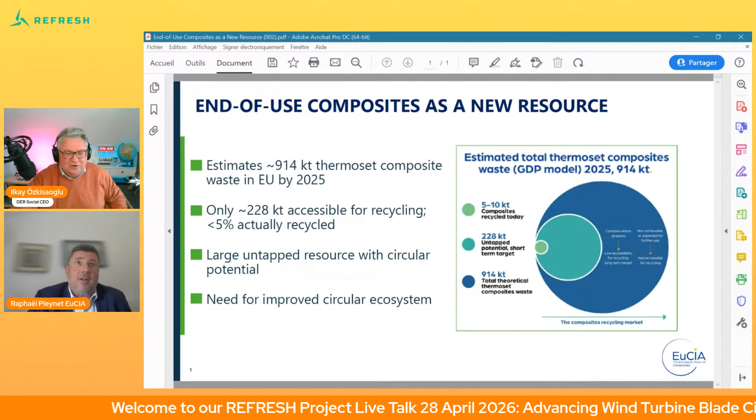Okay, let's get started with Refresh. Before talking about Refresh, because my colleagues will do it more deeply, I just want to share the vision of EuCIA regarding circularity. Instead of having a lot of slides, only one: the picture as it is today about the waste volume reaching the end of life of thermoset recycling, the thermoset composite materials.

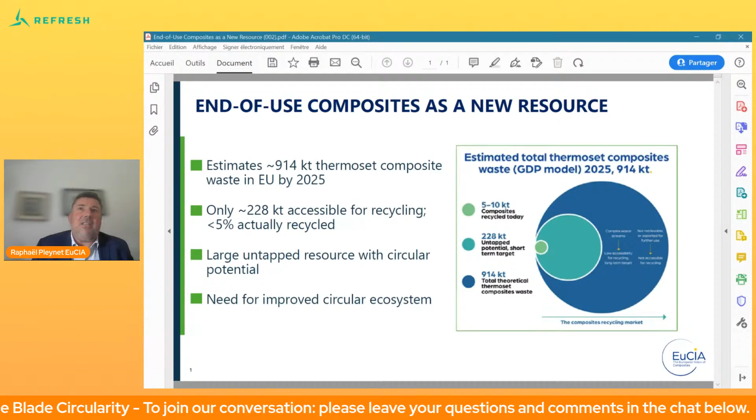As you can see on this graph, we made some calculations some years ago. That's an interesting story. In 2018, EuCIA had the vision to already start evaluating what was the volume of recycling material, the potential recycling material, meaning the volume of composite material reaching the end of life. At that time, it was around 450,000 tons. They decided maybe not to communicate it because they were not sure — maybe it was not good news. So we did this calculation again, updated in end of 2024, to estimate what the volume was last year.

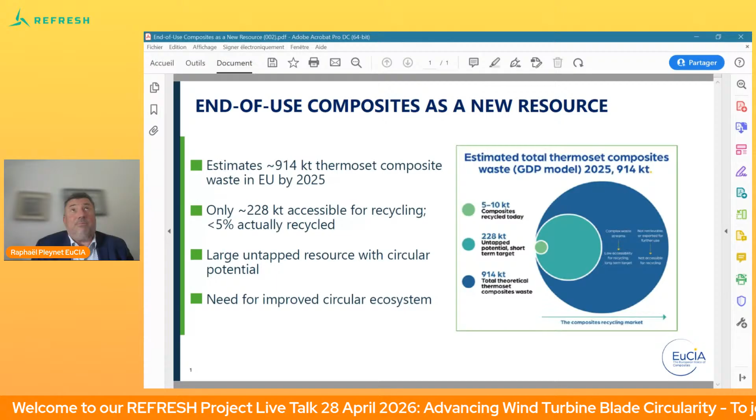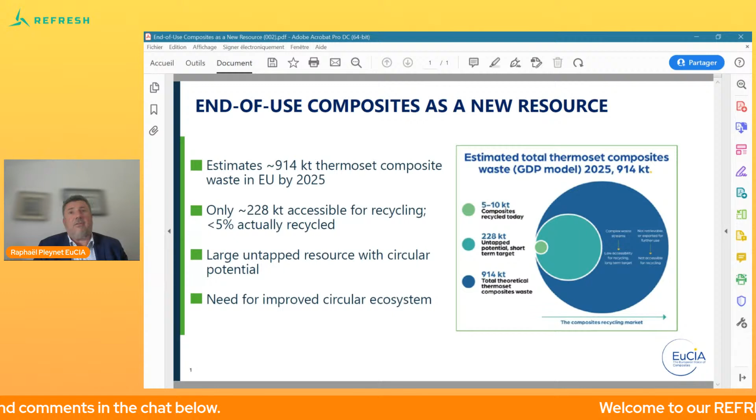We also have some graphs to show the trend. Now, as we have probably started to evolve, all of us, regarding the vision of the end of life of material, we see it as an opportunity. We estimated there is a theoretical potential of 900 kilotons, 900,000 tons of materials reaching the end of life last year in Europe. From there, we have evaluated the untapped potential — almost 230,000 tons — what is really available now.

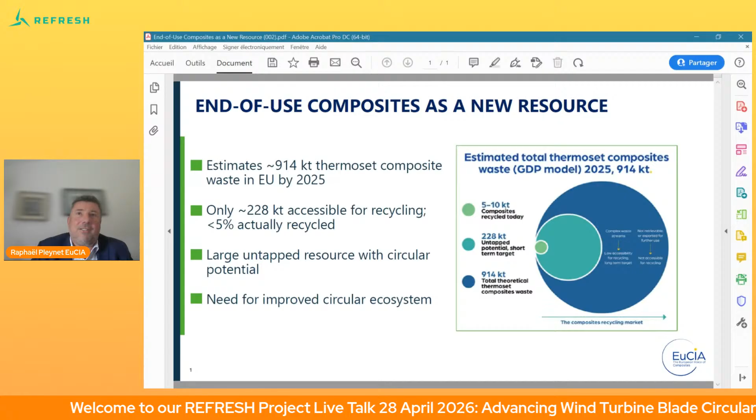Those two numbers are very interesting to see what we are talking about — how big is the question. It's also to motivate investors, waste recyclers, all the supply chain to come, because there is already something there. Then the third number is also interesting: only 5,000 to 10,000 tons are truly recycled today. So it's almost nothing. This is what our whole challenge is about, and it's why we are speaking about circularity.

But circularity today is even more important because it will reinforce our resilience. We want the European community to be less dependent on imports from abroad, and it's also an opportunity to reuse at the end of the use of a material. You can reuse it through different options. One of them is recycling, but before recycling you have reuse, repurpose, remanufacturing — all the R's, you may know. It means finding a new function for a composite material.

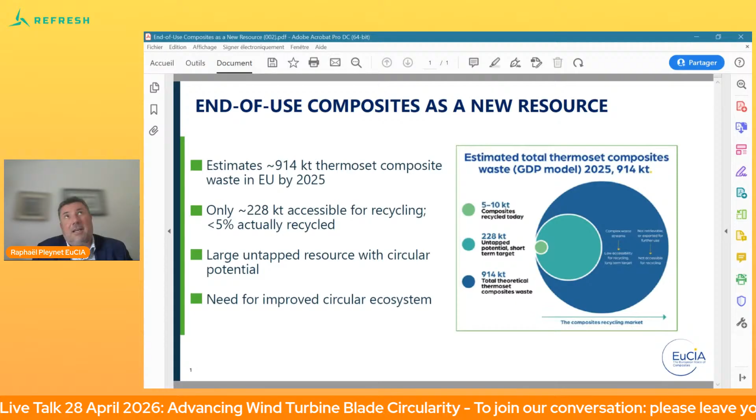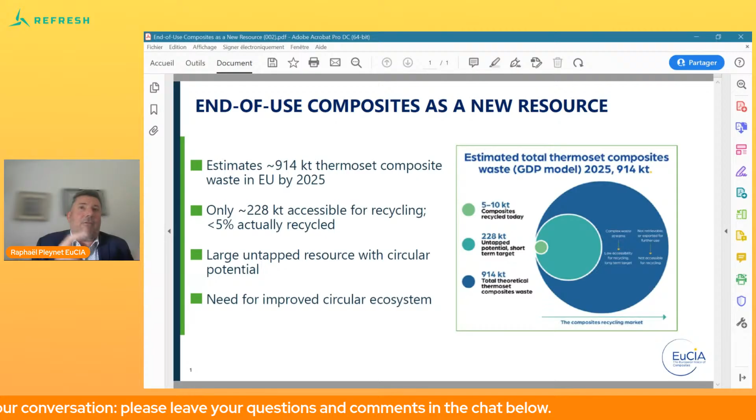As you know, from the beginning, composite material has been designed for performance, durability, and lightweight. That's why you can reuse composite material for 50, 100 years. For example, recently I was talking with the boating industry, and we use in our calculation that the average boat life for the hull is 50 years. One person from Finland challenged it and told me it could be 100 years — and he's right. You have to take an average, because a boat that's 100 years old is probably old-fashioned, so you have to redesign it. But the material itself, the composite material, works for 100 years and even more, probably.

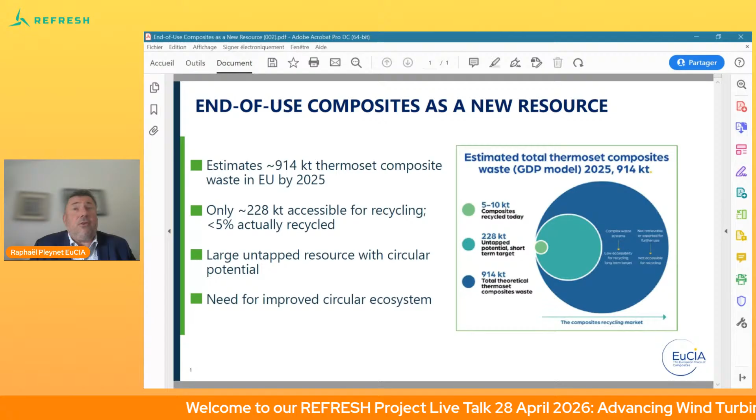So we are all focusing on how to organize the value chain to connect the people, and that's also what we have started to do with the European Circular Composite Alliance — to put all the stakeholders together and figure out how to address it.

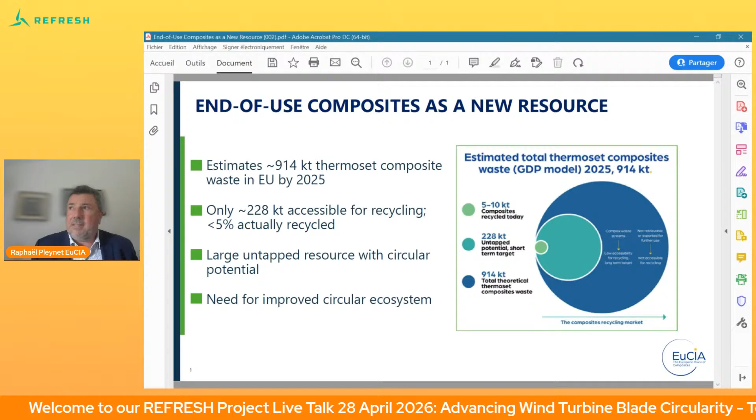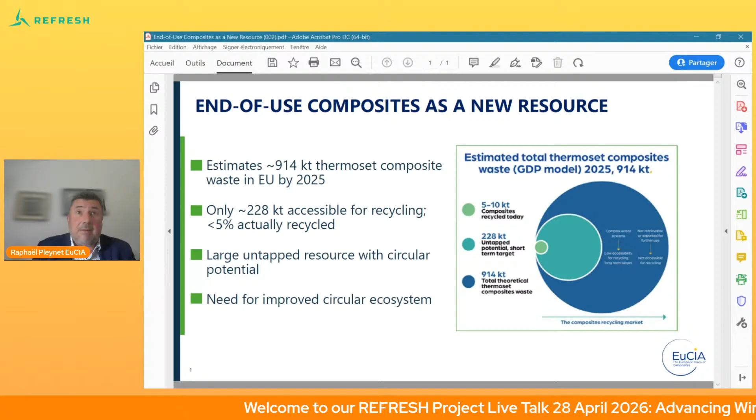The point today regarding Refresh is that Refresh is almost 4 years old, so it means we started thinking about this project 5 years ago. At that time, it was to demonstrate with a holistic view how we can recycle wind turbine blades. What's fantastic is that after almost the end of the project, we see through the different technologies that, yes, it's possible. So today it's not a question of whether it's technically possible, it's how to scale up the technologies a little bit. You will see that the technologies are ready.

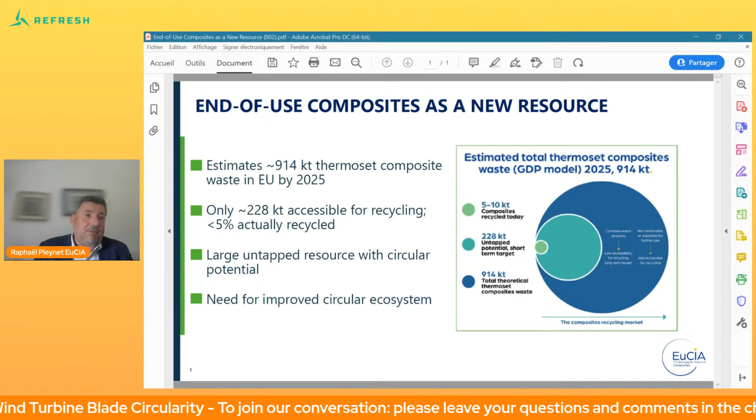This project has personally taught me a lot about different technologies, whether mechanical recycling or thermal recycling. We have a huge manufacturing investment, and that's also the passionate part of this, with all the challenges when you go to commissioning and all these things. But we demonstrate through this project that it's possible.

On top of it, and I will finish on that, we also had a view on other possibilities to reuse the material. We did calculations of LCA. We see that when you do all these technologies, you can also reuse the resin and reuse the gas, which is also a value. That gives a lot of hope for the future of composite material.

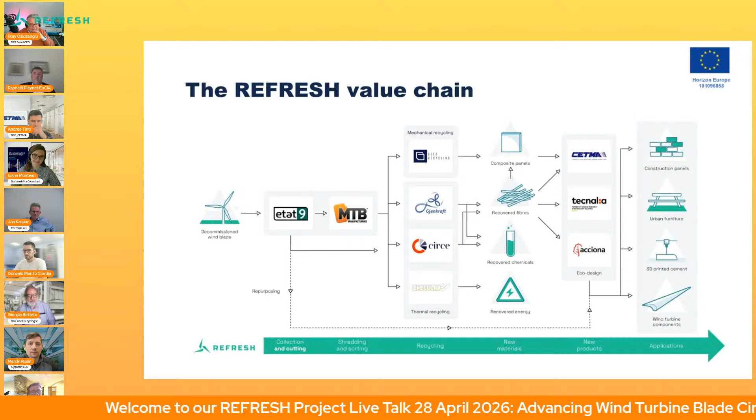Okay, hello everyone, I am Daniel Grisenti, the project coordinator of the Refresh project. So I will be giving you an overview on the project before leaving the floor to the other partners that will present in detail their technical work and part.

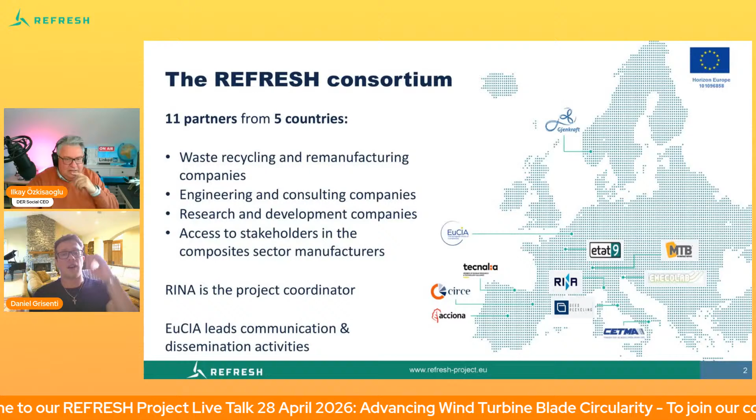A quick overview on the consortium: we have a total of 11 partners from 5 different countries working on our project. We have waste recycling and remanufacturing companies, engineering consulting companies, as well as research and development companies. RINA is coordinating the project, and we have EuCIA as the communication and dissemination activities leader.

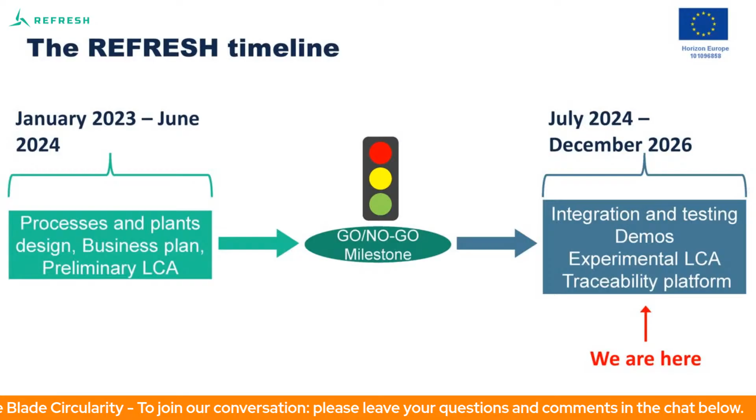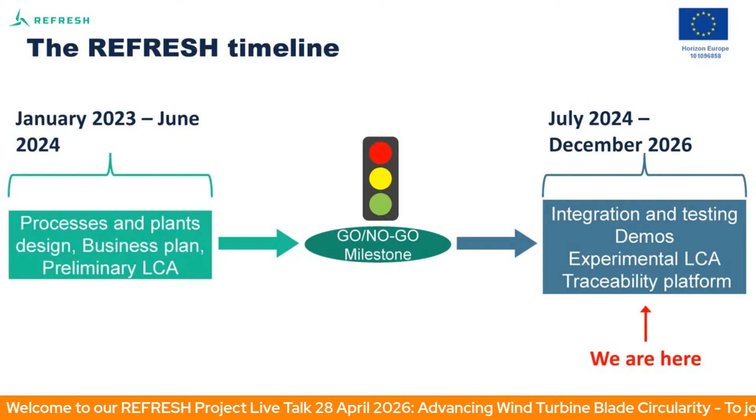The project started in January 2023 and will end in December 2026. It started with the first design phase in which the process and plants were designed. After that milestone, the design phase, we are now in the integration and testing phase, which will end with the end of the project.

So let's give an overview of the concept of our project. The whole idea is that we start from the decommissioning of wind blades - the end-of-life wind blades - and we cover the whole value chain through to remanufacturing into new end products. We start with the decommissioning, and then we have different recycling treatments: mechanical recycling, thermochemical and thermal recycling, repurposing, and so on.

And everything will be governed by the decision-making tool, which is an AI tool developed within the framework of the project, that will decide for each decommissioned and pre-treated wind blade which route will be preferable at that moment, based on market demands and also the condition of the blade.

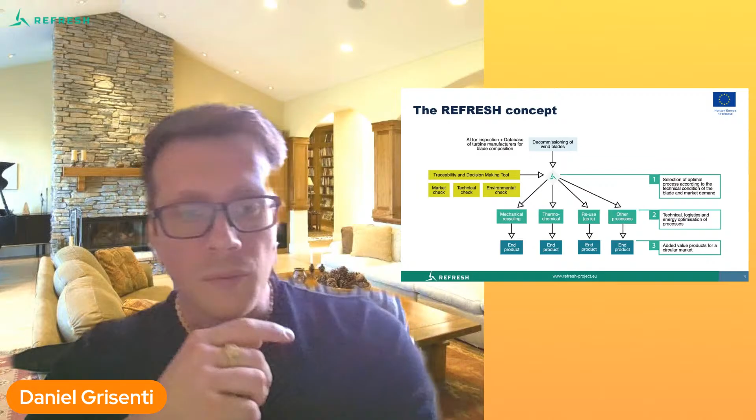Briefly explaining the value chain and the partners, so you can see where our partners are located. We have the decommissioning of the wind blades and the pre-treatment, which consists of pre-cut and pre-shredding, done by ETAT9 and MTB. Then we have the recycling phase, divided into mechanical recycling from Gees Recycling, thermal recycling from Gjenkraft, Circe, and Ecolab for dust recovery.

This leads to composite panels, recovered fibers, chemicals, and energy from dust recovery. Then we have other companies like CETMA, Tecnalia, and Acciona, covering the last part of the value chain into applications and the final end product, like manufacturing of construction panels, 3D printed cement, repurposing, and other wind blade components.

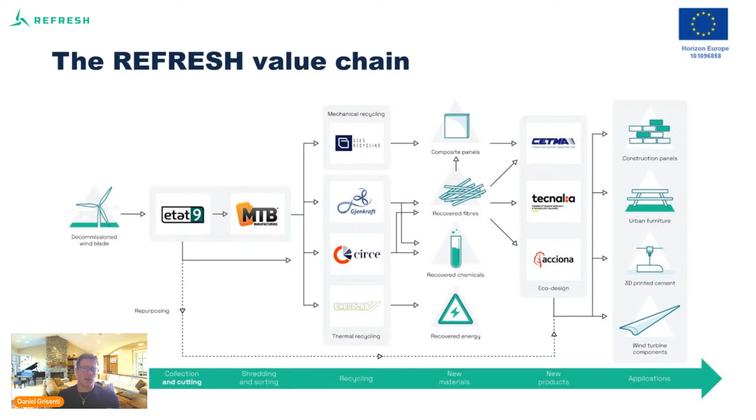So this was a quick overview of the project. I will leave the floor to the other partner now, who will explain in detail what I have basically shown.

All right, thank you so much, Daniel, for these insights. Let's continue with Giorgio Betteto from Gees Recycling. Giorgio, I've known for a couple of years now, I interviewed him already at JEC World, I think in 2024, with very good results. Giorgio has interesting solutions and also prepared a presentation, so Giorgio, we leave the stage to you.

Perfect, thanks to all. Okay, I have to escape somehow this... I'm sorry, I took the wrong one. For some reason the numbers are covering.

So this is your presentation, Giorgio? No, let's get... Daniel one, no that's the wrong one. Yes, because it's still active with Daniel. That needs to go away, and yours has to come in. You see, community, there are a lot of presentations in my backstage right now, and I still need to get used to it. But this is Giorgio, I think now the right one, correct? Yes, now I think we are okay.

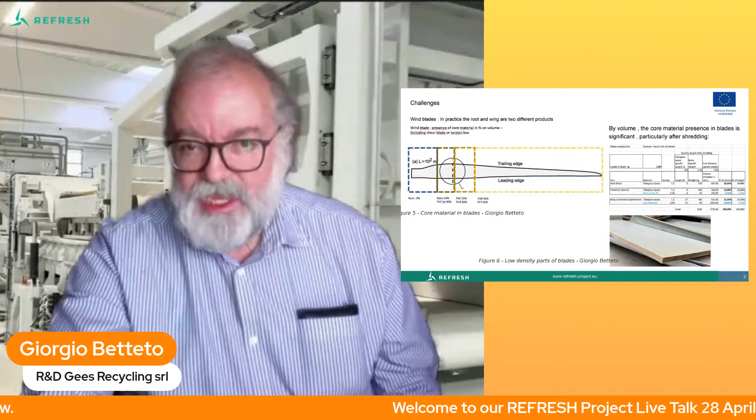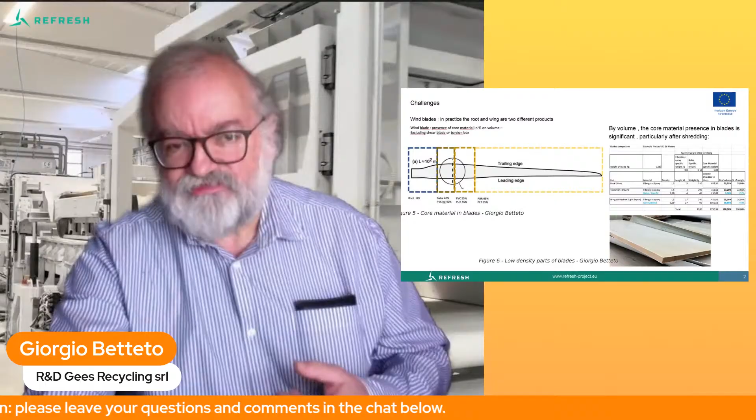A wind blade is practically three different composites. We have the root part, which is all composite, all epoxy and fiberglass, very thick and very hard to shred and particle-reduce. We have the transitional part, where we again have a lot of hard composites. Then we have the blade or wing part, where the quantity of hard composite is much lower, with a lot of low density material.

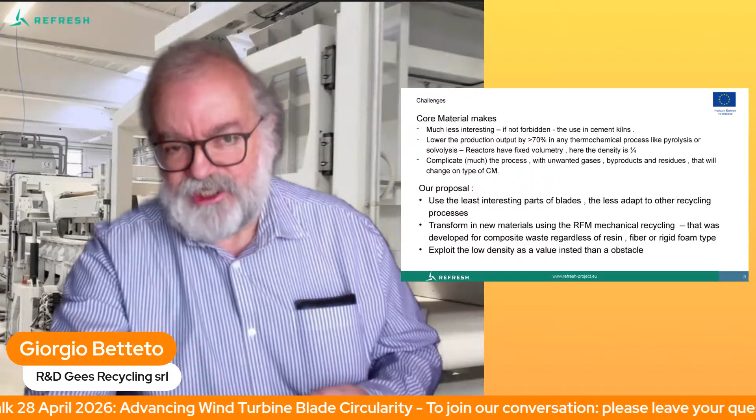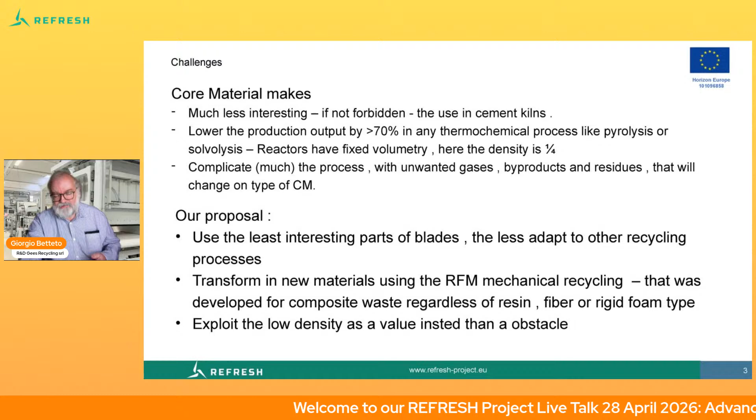So the composition is different and ideally requires a different recycling process, because the core material complicates any kind of thermochemical recycling. First, you have low density material, so any thermochemical recycling operating on a fixed volume vessel has lower production. Then you have a lot of different materials - we have found even four different core materials inside the blade.

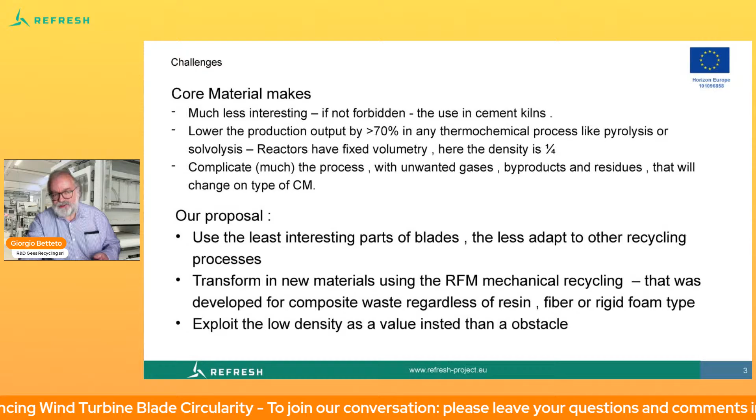Our solution is to use the thermochemical process where it's best suited, and use the mechanical process for making materials where we can process it regardless of the kind of resin, fiber, or foam.

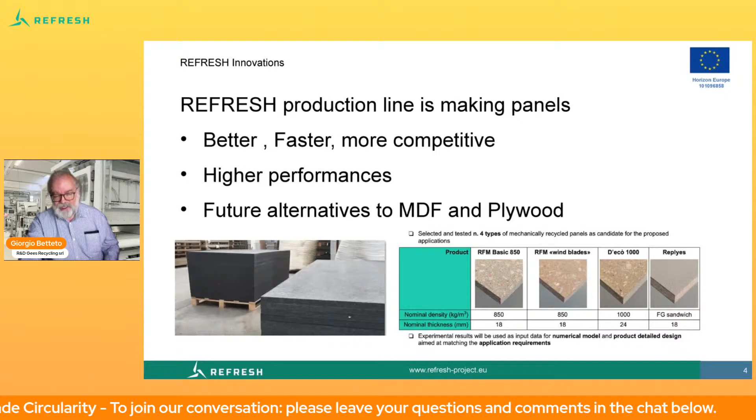Now we have the refresh production line. We currently have industrial production, and we are starting the new production line from refresh. In these days, we are doing trials and production tests. We have found that it's possible to obtain panels.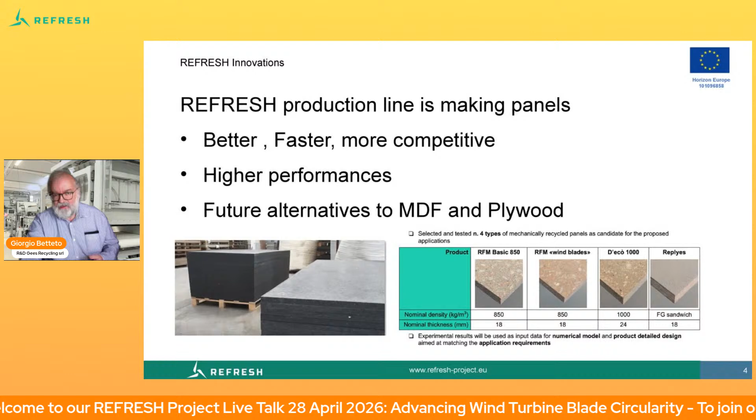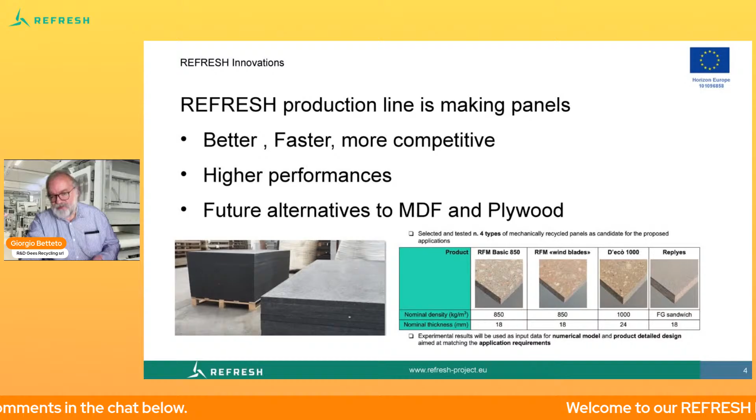Something relatively simple, but where there is a really large market - better, faster, and more competitive with the refresh production line, with higher performance. And not so much future, because we are already selling as an alternative to MDF and plywood, in different qualities for different applications.

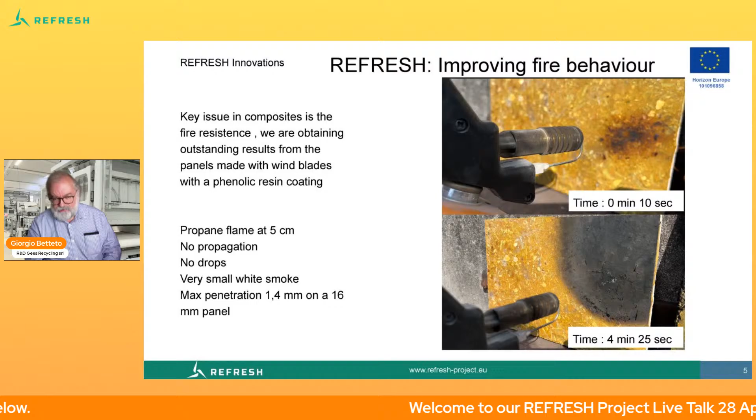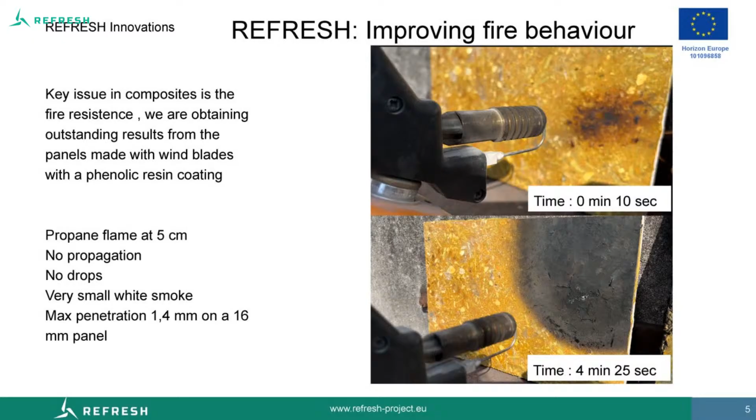One of the most interesting things in this development is that we found that using the wind blade waste with a specially developed phenolic resin coating, a low toxicity phenol resin, makes it possible to obtain really interesting fire-resistant behavior. We can achieve not just fire resistance but also smoke generation that is an order of magnitude lower than alternative products, so no black smoke.

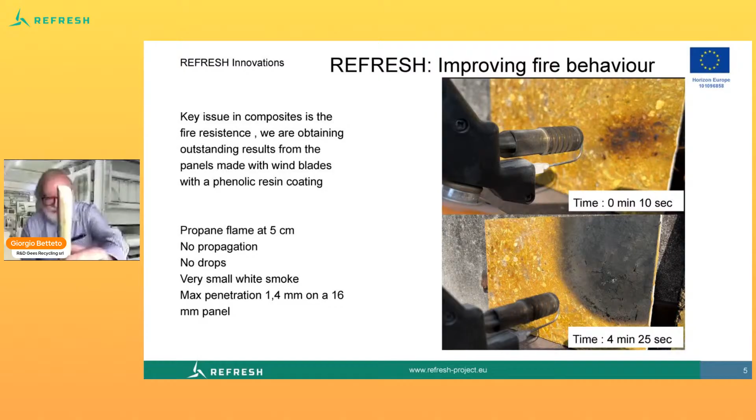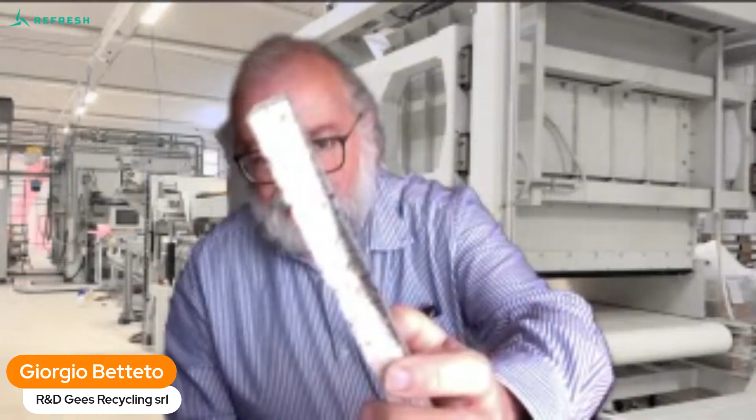And most interesting of all, it's also something where there is a very low degradation of the material. This is a cut of the panel that you see. Have you seen, fire penetrated for less than 1.4 millimeters after 5 minutes of propane flame.

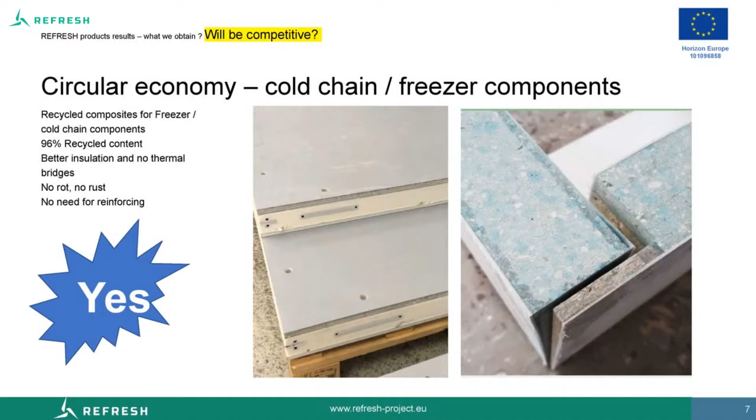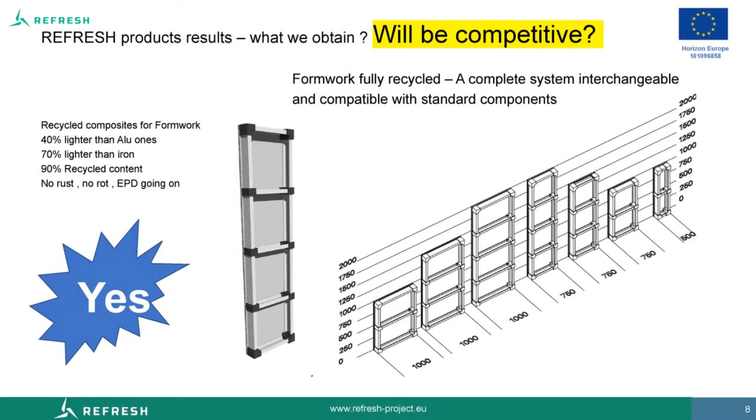So this is why recycled composites are the ideal material to make this. We are developing, and then Chetma will tell more about this, formwork for concrete. Also, because I personally think that could be a really interesting application using complete composite formwork, for example for the foundation of the new wind turbine, made with the scrap that comes up from the wind turbine.

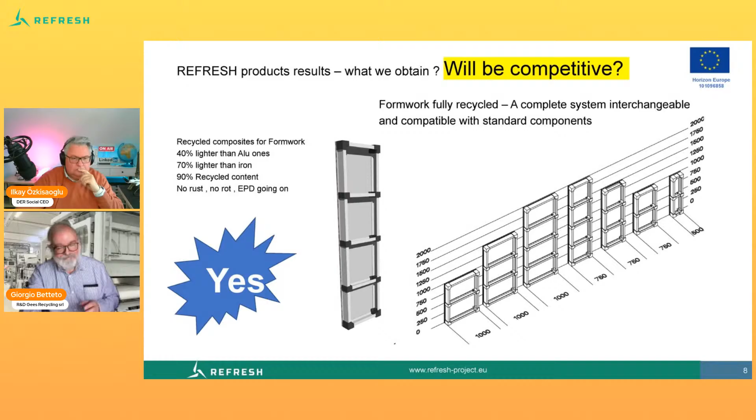Plus, we are also developing interesting projects, or already building, using also the recycled glass fiber that GMCraft makes, using the profile from wind turbines and so on. It's possible to make a lot of things with composite, mostly where you need something with long-term durability, low carbon content, and so on.

Okay, I have. I hope to be on time, and I am willing to answer any kind of question here or later.

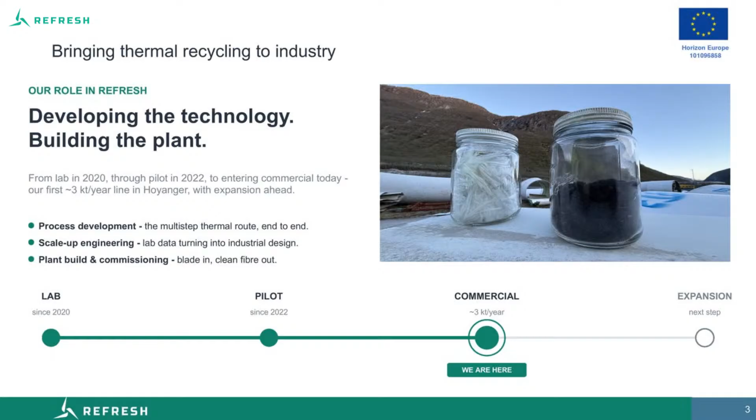And the last one, which is the most exciting, is actually to take those drawings and documentation and put them into real equipment, a real working facility with high volume throughput and the possibility to recover recycled materials for the industry. So the photo you see on the right is not just a plan, it's a reality. We are now finalizing the commissioning of our plant and moving to operation, where we will produce pure glass and carbon fibers for the future composite industry.

So our ambitions, where we are heading - we have three goals. We want to deliver. The immediate job is to prove circularity at industrial scale alongside our Refresh partners, to demonstrate with real data that the wind blade can actually become next generation composite products.

Then the scale, which is also beyond Refresh - we want to become Europe's leading composite recycling supplier. Our roadmap goes from today's first plant towards nearly 100,000 tons of composite by 2036. So we have an ambitious plan for how and when we want to grow, in terms of not one but multiple facilities, hopefully multiple facilities across Europe. And we want to deliver the recycling backbone to the maritime and automotive industries to actually move forward with composite recycling.

And the last one, the biggest one, is actually to transform. We want to drive the change, power new raw materials, turn yesterday's waste into tomorrow's resources, and make recycling of composite the default for the industry - not an exception or something nice to have, but actually a standard for the entire industry.

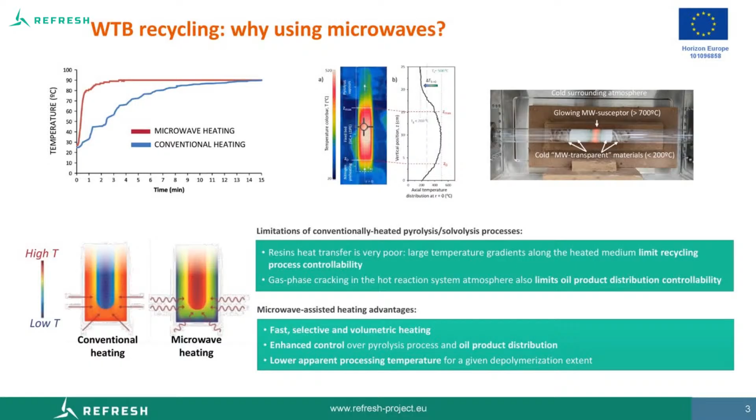Microwave heating offers a different approach. It can be much faster and more selective, and it allows us to heat selectively the materials that absorb microwaves, giving better control over the process and potentially over the composition of the oils produced.

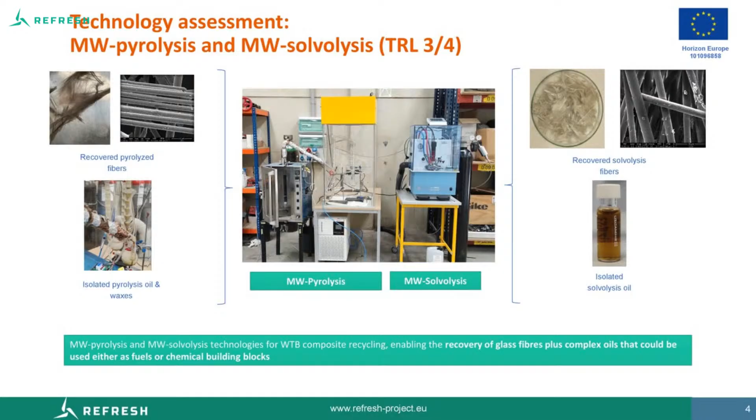This expertise defines our role within the Refresh project, where we are applying microwave-assisted technologies to support the recycling of wind turbine blade composites, comprising pyrolysis but also solvolysis. Both routes aim to recover valuable products from the composite waste: glass fibers and oils. The oils could potentially be used either as fuels or as chemical building blocks, depending on their final composition and quality.

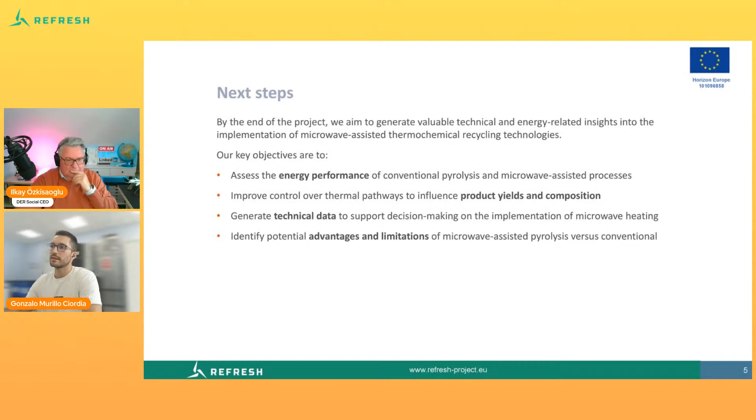To conclude, our next steps are focused on generating reliable technical data to support future decision making. We want to assess the energy performance of microwave-assisted processes, understand how they influence product yields and oil composition, and compare their advantages and limitations with conventional technologies. This way, the project will help clarify where microwave-assisted recycling can add real value for the treatment of wind turbine blade composites. And that's all from my side.

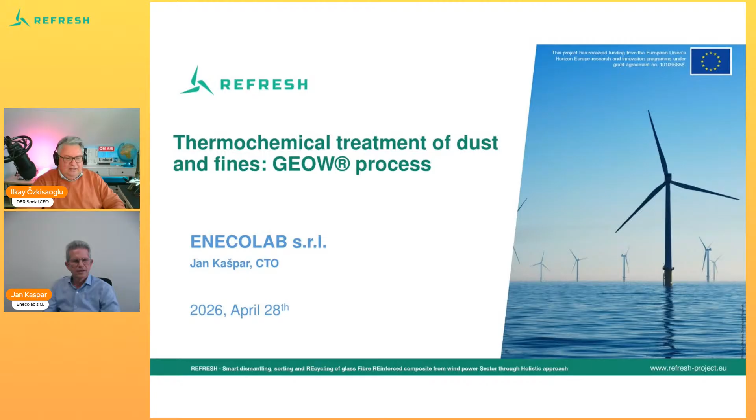As I said, thermochemical treatment of dust and fines is the specific task of our company. The interesting point is that dust and fines are the residuals of nearly every kind of processing of the blades. You have to cut them and so on, and they can represent a very large part of the starting materials. Clearly, the present routes are unfavorable from an environmental point of view, because either burning in cement factories, if permitted, or landfill is essentially how they are disposed of.

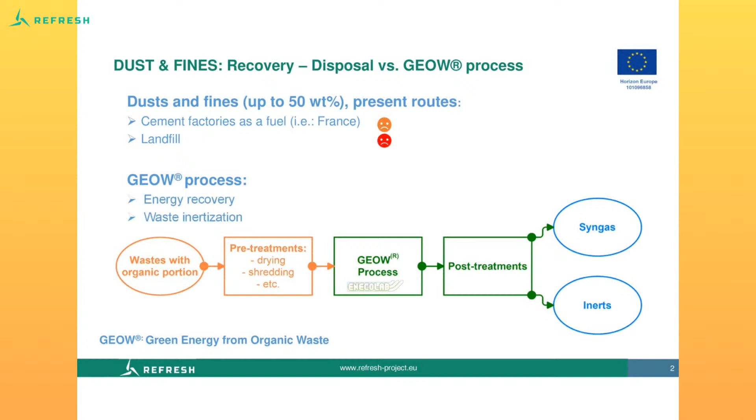Our process is simply a pyrolysis process, running at high temperature to produce mostly syngas as an energy carrier, and inerts. Pyrolysis is very often used in the valorization of this disposal material, but the point is that you have different kinds of products being formed: the gaseous part, the char, the liquid part, and the inorganics. Clearly in our case, it's the glass.

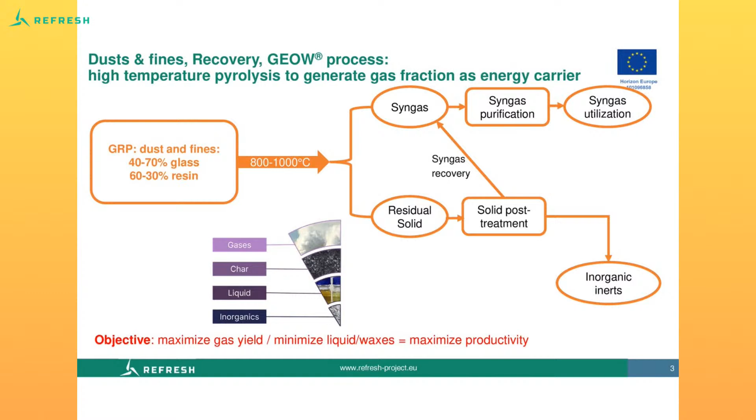Why go into the high temperature reaction? Because as you increase the reaction temperature, you improve the yield in syngas, which can then be used as an energy carrier, either to generate electricity, heating, or other purposes. But the residual solid typically gives out inorganic inerts. You have to keep in mind we are using dust and fines, so the fiber is nearly destroyed, making the glass less interesting. So the objective is to maximize the yield of the gas, which is the easiest energy carrier to use in our case.

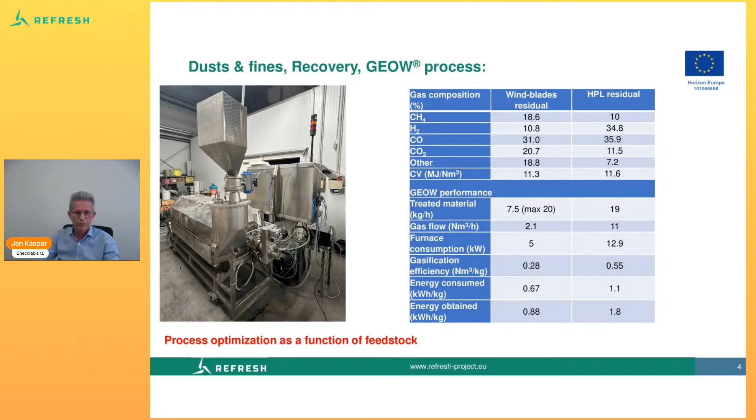The intrinsic point is the comparison between the energy consumed and the energy obtained. It seems quite low in this case because the wind blades have a large amount of inorganics. As you can see in our processing, if you use, for example, HPL, high pressure laminate residuals, you can obtain a quite high yield of energy compared to that use.

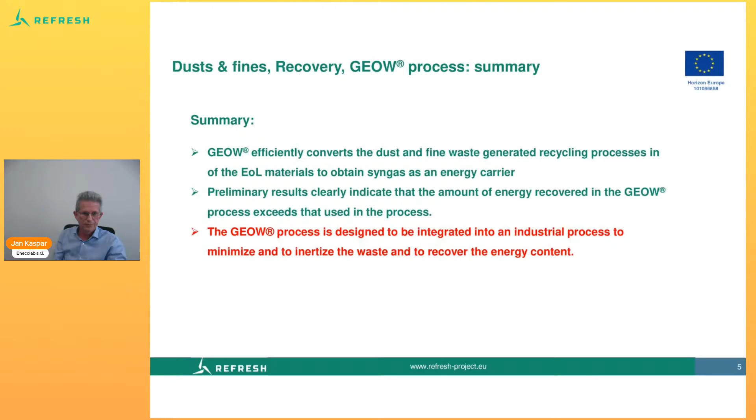So I wish to thank you for your attention, and if you have any questions I will be happy to reply. So thank you, Jan, for this introduction.

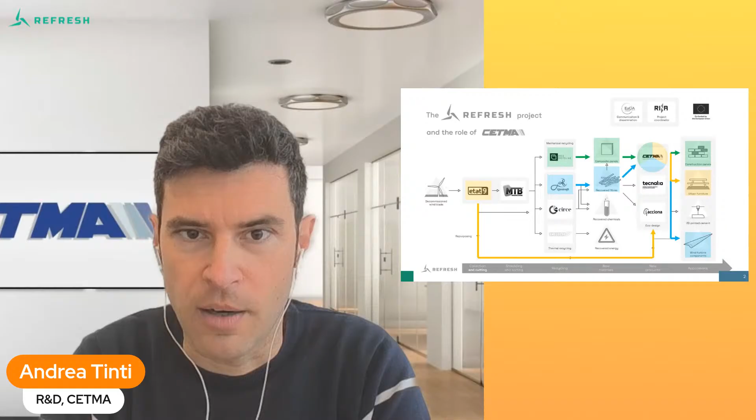The best way to introduce the role of CETMA in Refresh is to look at the project value chain. CETMA is coordinating development of new products from end-of-life wind blades for several applications by using eco-design methodologies. So in the next few minutes, I'll share key insights on three representative case studies we are working on, based on as many different recovery routes.

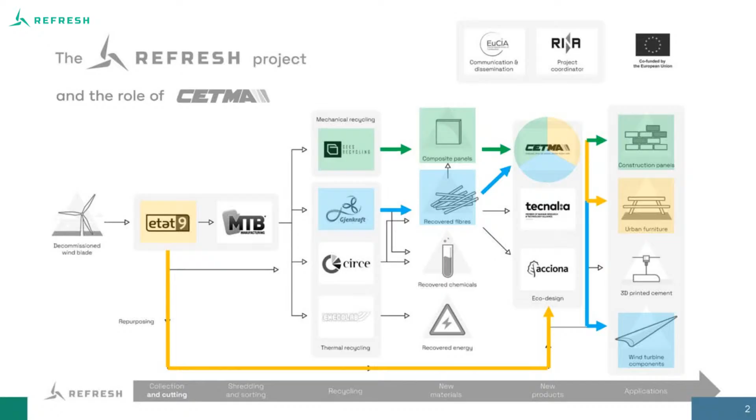First, in blue, we have application of secondary raw materials from thermal recycling, in particular recovered glass fibers, to be used as part of new wind blade components. In green, we have application in building and construction of mechanically recycled composite panels. Finally, in yellow, repurposing of full blade parts after only minimum reworking, with application in urban furniture.

The first case study, which we call the circular wind blade, is a multi-partner case study involving not only Refresh partners but also external stakeholders, allowing us to build up a full product supply chain. Basically, thermally recycled glass fibers were reprocessed into a non-woven mat that has been used as a non-structural part in a new wind blade layout, in a really closed-loop approach.

A full-scale section demonstrator has been manufactured and was exhibited at the Innovation Planet at the JEC this year. In the next months of the project, numerical validation and life cycle analysis over the whole product value chain will be assessed.

Next, the second case study is probably the one currently closest to the market: the framed formwork for shaping vertical concrete walls and columns. The concept was to substitute the outer sheet, traditionally made of plywood, with a mechanically recycled composite panel.

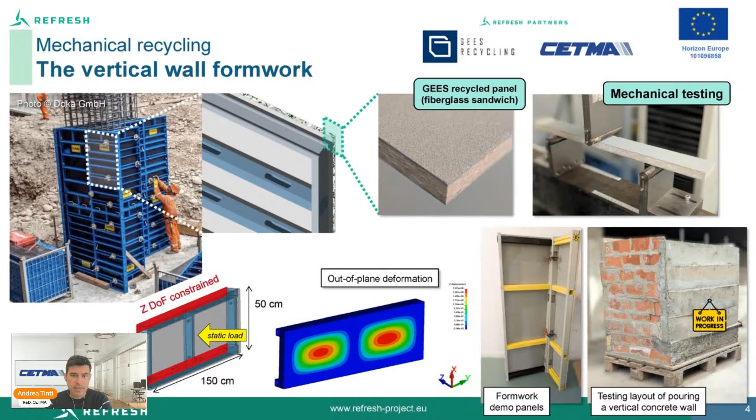A numerical study has been developed to model a frame formwork based on recycled panels, by modeling the fresh concrete static pressure and the resulting out-of-plane deformation. The formwork elements have been manufactured based on the optimum numerically modeled design, and experimental validation is currently in progress with real testing in a worksite environment.

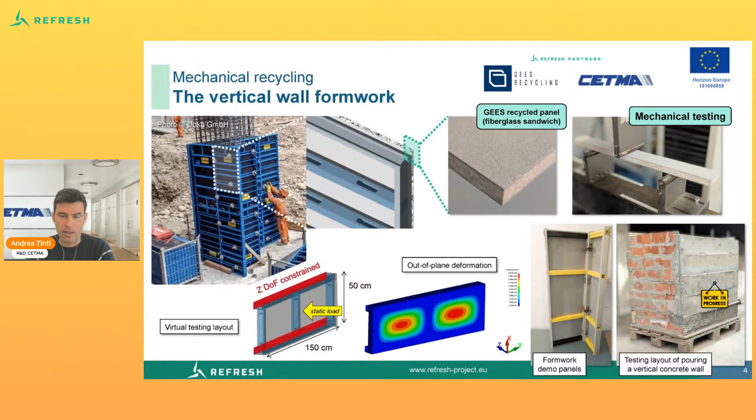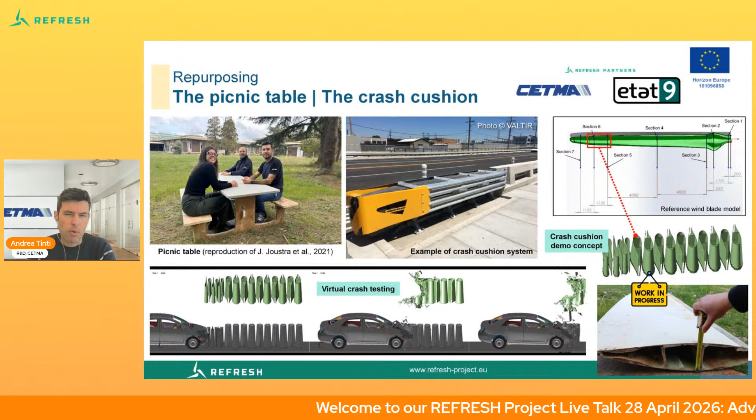Finally, about repurposing, our general idea was not to limit our effort to urban furniture items like the self-supporting picnic table we developed based on a previous study, but to try exploring more structural applications that could take advantage of the residual mechanical performance of end-of-life components.

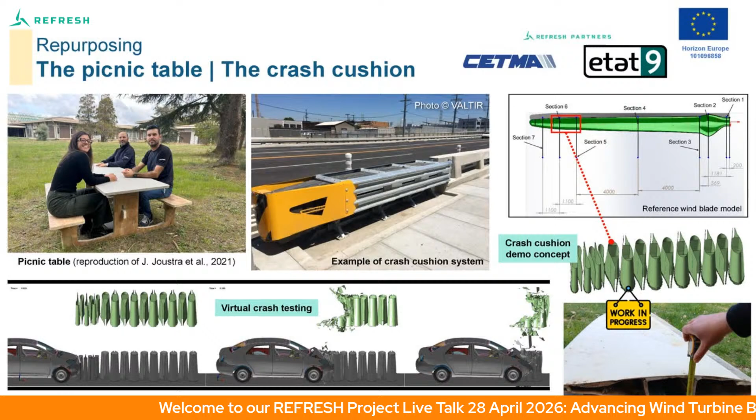For example, a crash cushion. Again, a numerical study has been developed to evaluate the technical feasibility of a crash cushion based on a number of wind blade sections recovered from a reference blade model. Virtual crash tests have been run in different configurations, showing promising results in terms of vehicle impact severity indexes.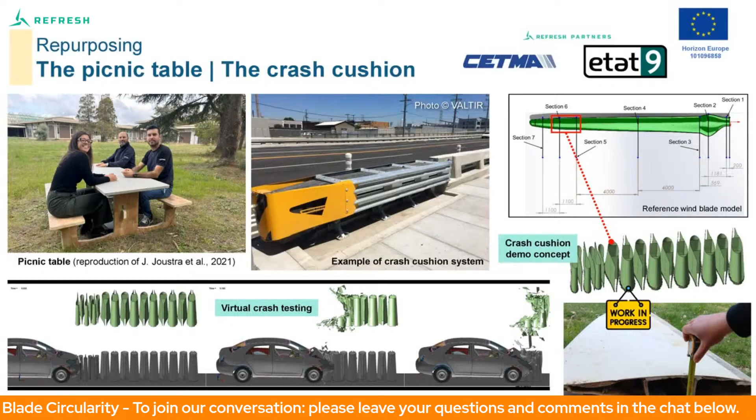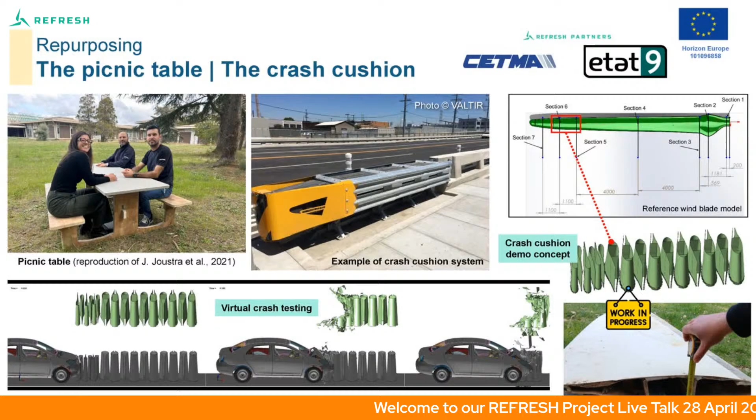In the last part of the project, a demonstrative prototype will be physically assembled, mostly for dissemination purposes, opening the door to future improvements within a dedicated project, possibly involving sector stakeholders.

Of course, there's no time to go into more technical details. What I wanted to outline in this short presentation is that with today's knowledge and technologies, recycling of composites and also other virtuous recovery routes like repurposing are not only necessary in the framework of circular economy, but also widely possible. Regarding potential applications like those shown today, the only limit in the end is imagination. Thank you very much.

So that is a good statement. The only limitation is the imagination.

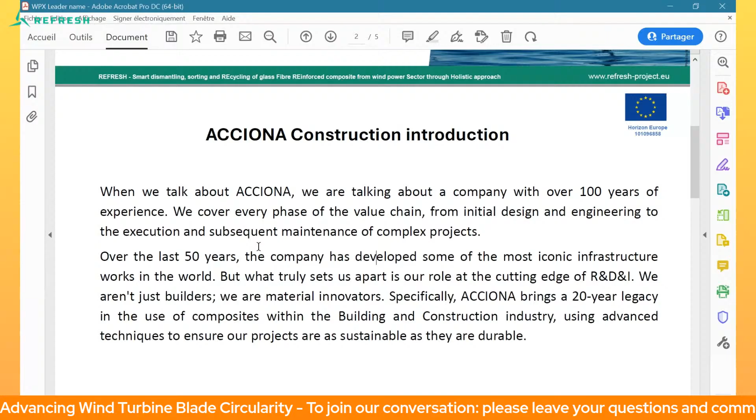On the other side, they have developed over the last 20, 25 years wind blades, so they are in the composite market, and it was the perfect link of how can you combine the end of use of a material having a new life through the construction market. Really having Acciona and Anurag part of this is a big advantage.

The role of Acciona, who is more at the end of the Refresh project, is when you get the raw material and what you do next. And that's where they are developing different functional prototypes. I'll go to the next slide to show you.

So there are 3 different projects. One is to use the milled wind turbine blades and to make pultrusion out of it. This is something now they do at, I would say, industrial scale.

The second one is the production of non-woven fabrics. Earlier, Ilkay was mentioning that Anurag was at Techtextil last week, which is the largest world event for technical textile processes and actors. He was also looking for solutions, and they are almost done regarding this project to produce non-woven fabrics, to then be used in production of a composite part.

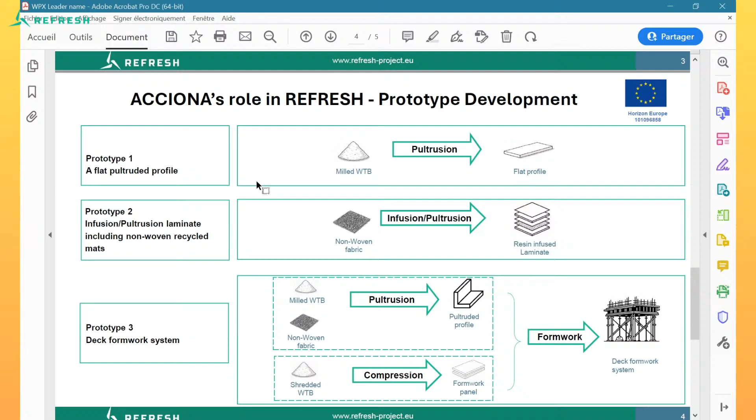And the third one, as Andrea was showing, is the formwork system, which is a mix of the different technologies they have to produce the formwork. So having such a large construction leader in Refresh was really a big advantage.

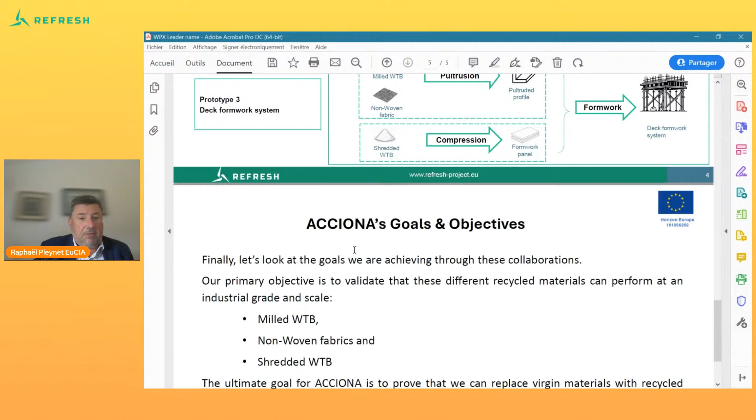When I was asking Anurag where they are in the prototypes, since the project ends at the end of the year, they are very confident to succeed on all 3 projects by the end of this year. So it's no longer a prototype, it becomes reality. That's what I can say on this.

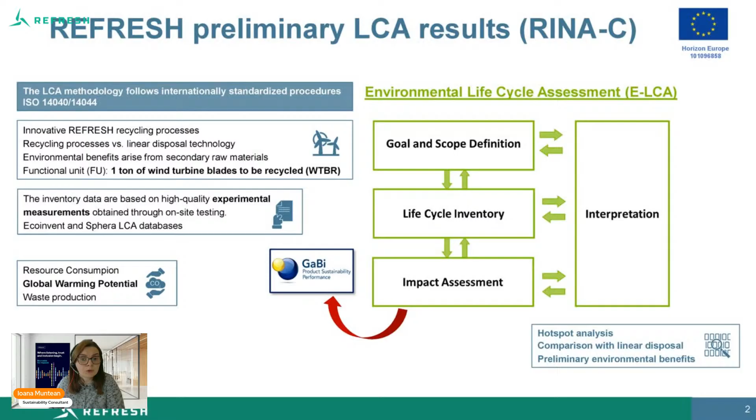So basically, if we want to see how recycling behaves with respect to traditional disposal methods from an environmental point of view, we can see that in the climate change impact category, all Refresh recycling processes show lower environmental impact than landfilling or incineration.

But we know also that recycling processes produce secondary raw materials that are capable of substituting virgin production, and this substitution leads to further avoided greenhouse gas emissions upstream and amplifies the climate benefits beyond those shown on this graph.

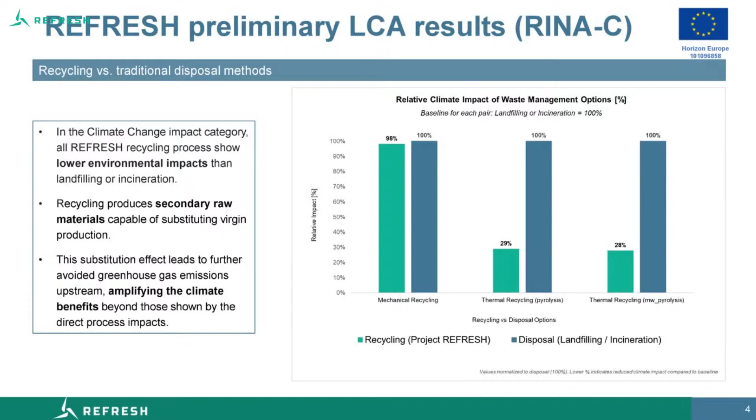This is my last slide, and here I would like to bring up to the audience the fact that the recycling processes produce secondary raw materials. So all the recycling routes analyzed in this study deliver large climate benefits because we basically avoid virgin material production.

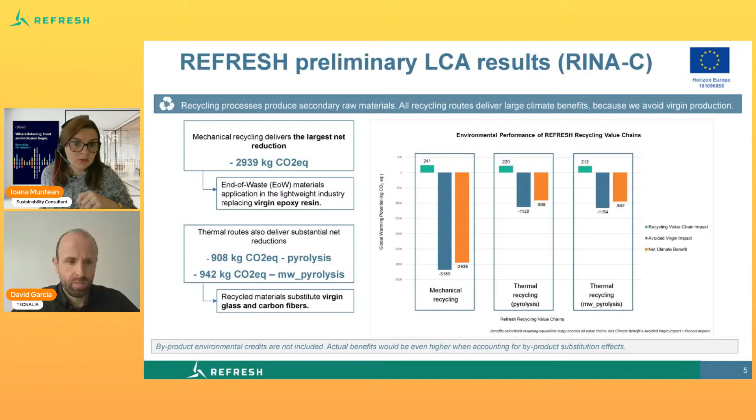So we have that mechanical recycling delivers the largest net reduction, almost in the order of 3 tons of CO2 equivalent. But the thermal routes also deliver substantial net reduction, nearly in the order of 1 ton of CO2 emissions.

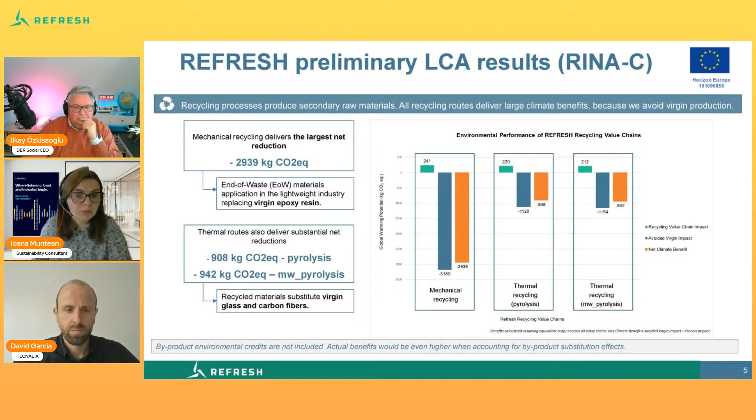I've finished my presentation. I think that sustainability is becoming central also in this sector. Thank you for your attention.

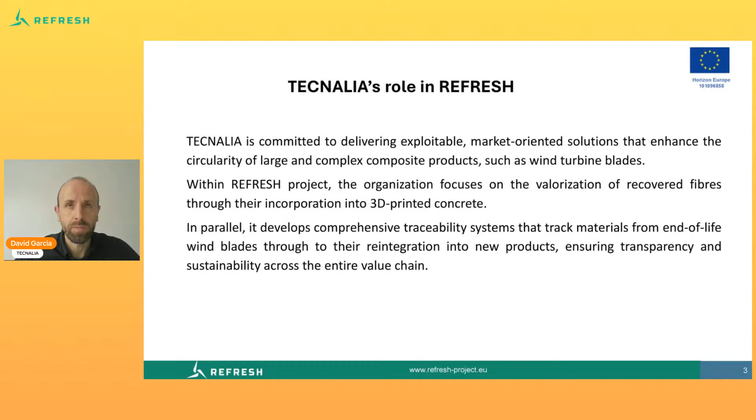In this project, we have 2 different roles, 2 different types of activities. First, we are leading one traceability platform to support the circularity of the wind blades from end of life, even when they are still in the wind farms, until they are totally reintegrated into new products and materials. Second, as I will explain later, we are also developing some 3D printed concrete solutions using some of the recovered fibers.

For the first solution, traceability, this includes several aspects, as you can see in this slide. We think that traceability is a key enabler for circularity. So we are not just developing another traceability platform, another piece of software in general, but we want to provide some real solutions for the market.

So for this, we are using, among others, blockchain technology to provide a secure, decentralized system. But perhaps for most of the audience and potential users of this platform, it's relevant to know that we are also developing it with a very clear view of being something practical, easy to use, and that can be directly applied in current market operations.

So we have also considered for its development a friendly user interface, clear dashboards. The relevant information can be stored there. And of course, we also considered the specificities of the wind blades value chain. We believe that platforms like this can support regulation and certification and can enhance transparency and, at the end, customer confidence, which is necessary to ensure market acceptance of the recovered materials.

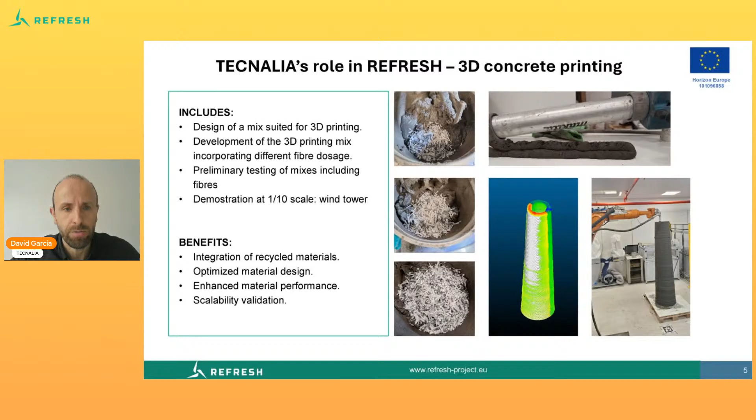As a second solution, we have used some of the fiber recovered in the project, both the mechanically recovered fibers that still have some resin covering those fibers, and also the clean fibers obtained after pyrolysis. In the past, we have used successfully those fibers, similar fibers, for manufacturing precast concrete elements.

And in Refresh, we want to move one step beyond, and we are testing those fibers for manufacturing 3D concrete printing. As you can see on the pictures, we want to be ambitious, and we want to also manufacture dowels and towers that hopefully can be used in the future also in the wind sector.

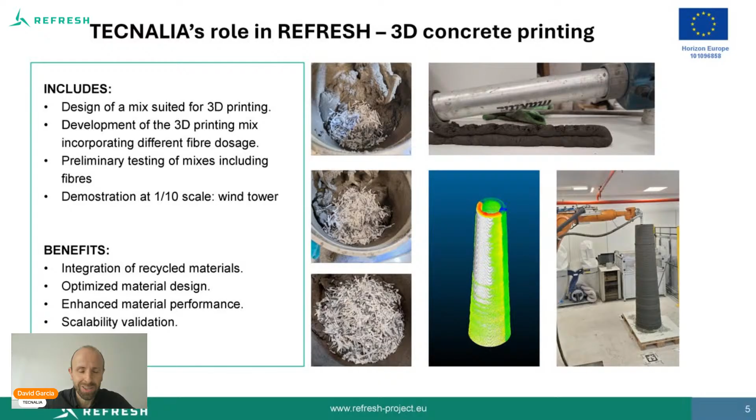Okay David, that was cool. Thank you so much for your presentation, short and quick towards the end. Dear community, I will ask you for 2 more minutes because I would like to discuss with Raphael 2 things.

First of all, Raphael, the Circularity Village was mentioned today. We had GenCraft there, Estelle also was there, your colleague. Tell us about what was the idea of you having a second booth at JEC World with this Circularity Village?

You're muted. Okay, first of all, thank you to all my colleagues to go through the presentation of Refresh. Before answering your question, it really demonstrates that the industry is ready, and that's really was the purpose of this project. So congratulations to all.

To your question, JEC, as Giorgio Bedetto is using it, is la Mecca of composites. The JEC decided that speaking about composite material needed to also address circularity, and having a focus on the circularity village with different solutions, as GenCraft was also there, was essential, because today we speak about this industry, what are the values of this industry, but also what is happening at the end of use. I don't want to repeat myself from the beginning.